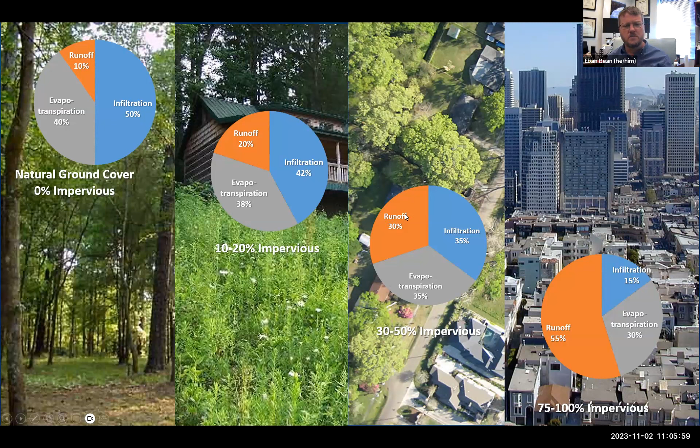So we have to mitigate that. Our conventional approach has been to kind of send that from the impervious surfaces into the street, and then into our storm drain, into our stormwater collection system, and then into our stormwater ponds.

Stormwater ponds were initially created for flood control and flow rate control, to make sure flooding and erosion don't affect our downstream neighbors. But they also have some water quality benefits.

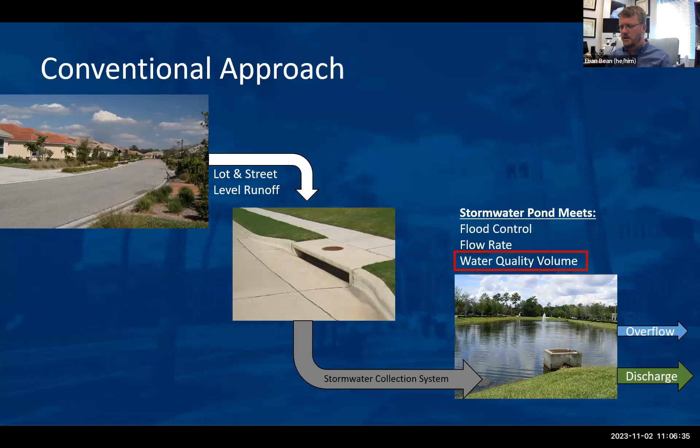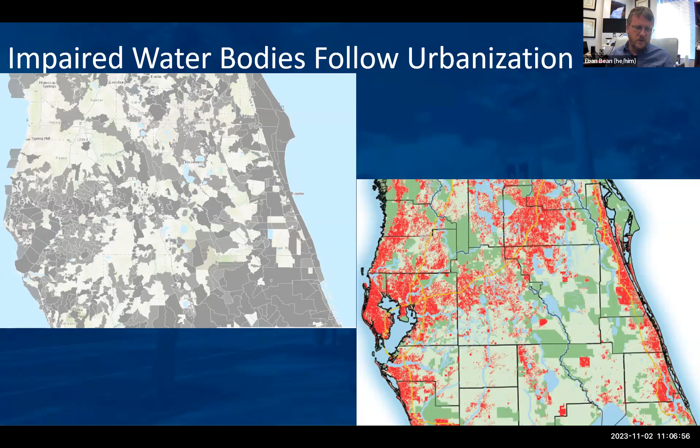However, some nutrients, particularly nitrogen, aren't removed from stormwater as effectively as we once thought. Over time, we've seen that impaired water bodies around the state, areas not meeting water quality criteria, tend to follow the urbanized areas. This is, in many ways, at least partly a result of our legacy of stormwater management, or lack thereof, leading to ineffective or insufficient stormwater treatment, particularly for removing pollutants that come off urbanized and paved areas.

So then we introduced this paradigm of LID and GSI. Most of our focus has been on GSI, but these go hand in hand. Low impact development in the land development process is that first stage where we look at the site and what it has to offer, identifying which areas are good for preserving or keeping as conservation, which might provide greater value in its current state than if we developed it.

That's the point of avoiding an increase in runoff, and then minimizing the runoff. How can we minimize the production of runoff, particularly from small storm events that happen regularly? One of the main ways is to disconnect our impervious surfaces.

So if we have a downspout that goes onto the driveway, the easiest thing any homeowner can do is move that onto the lawn, giving the runoff the opportunity to infiltrate into the ground. This helps mimic and maximize the pre-development hydrologic process, making the landscape function more similarly to how it was before development.

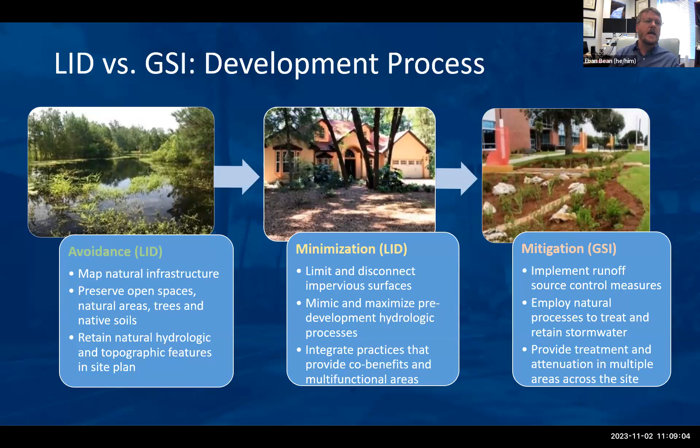These are stormwater practices intended to mimic the functional processes in the landscape, to infiltrate, store, and treat stormwater runoff close to where it's generated. They're really good for addressing those small, frequent storm events where we weren't able to completely eliminate, avoid, or minimize the runoff.

Then we started looking at different types of practices, beginning with some innovative ones—in this case, tree boxes and suspended pavement systems.

With tree boxes, we're looking at how we can essentially leverage the powerhouse of the tree to take up and evapotranspirate stormwater, often generated from an adjacent roadway—either taking it up and evapotranspirating it into the atmosphere, or allowing it to sink into the ground.

These practices are exceptionally valuable for areas in the right-of-way and for retrofits where we don't have a lot of space to work with, but maybe have a long linear space available. Through different products and technologies, we can create a lot of storage volume between the roadway and the pedestrian corridor.

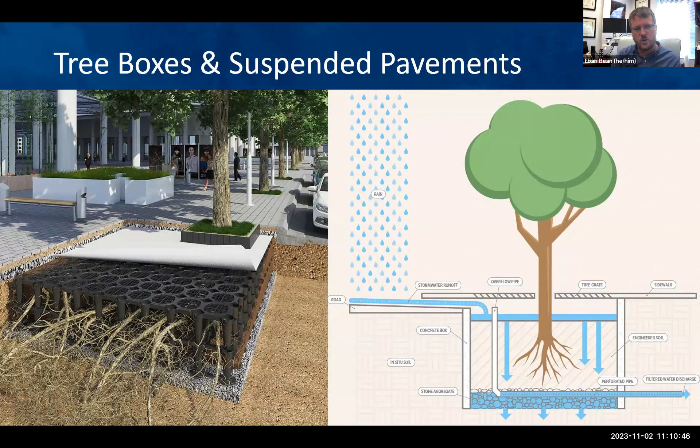Then we took a look at pervious surfaces or permeable pavements, however you like to use the term, and looked at their functionality and characteristics. There are about three main types: porous asphalt, porous concrete, and permeable pavers.

Porous concrete, I love this image and diagram. It's easy to identify pervious concrete because it looks like concrete, but it has the structure and texture of a Rice Krispie treat. Porous asphalt and porous concrete work very similarly.

They have interconnected void spaces created by removing the very fine particles from the mix of asphalt or concrete. The large particles are bound together, and the void spaces that would have been filled by that smaller aggregate allow water to move through it.

Though there's a difference in what they look like on the surface, they're fairly similar below as far as the profile goes: your choker course, and then a reservoir course.

And the soil down below. Now, we can put in under drains, and we touched on that for areas where we either don't want to infiltrate, or we may not have sufficient capacity to completely infiltrate, or if we just want this to function as a flow-through detention filtration system, particularly in areas where we have limitations on infiltration.

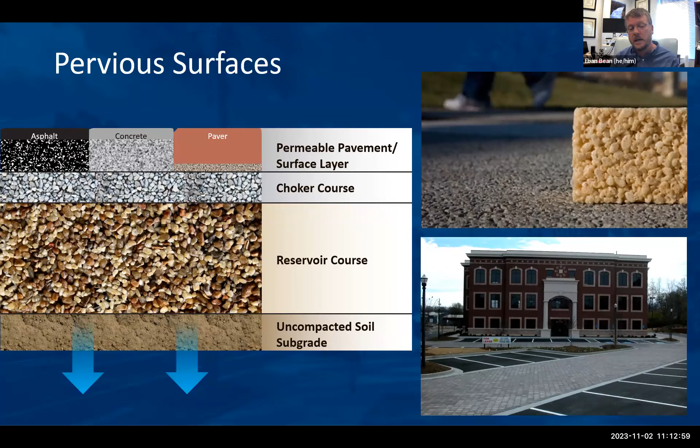We can typically take runoff—we tend not to recommend going above 1-to-1, but absolutely not greater than 5-to-1 impervious to pervious area. It's a really flexible and valuable practice, particularly in areas where land cost is high.

Next, we looked at bioretention and rain gardens, remembering that bioretention typically has some added features beyond rain gardens. We see these as a really flexible option, particularly in the right-of-way, where we can provide treatment for stormwater and also a landscape island sort of aesthetic.

The profile of bioretention is key here, where we typically store about 9 to 12 inches of water on the surface. There's a mulch layer, and usually an engineered media. That's one of the distinctions from rain gardens—that media is designed to remove pollutants and take up nutrients to improve water quality.

They typically have an under drain as well, to help recover that storage volume if needed. Some of them have this upturned elbow outlet fixture, where the pipe extends up from the bottom.

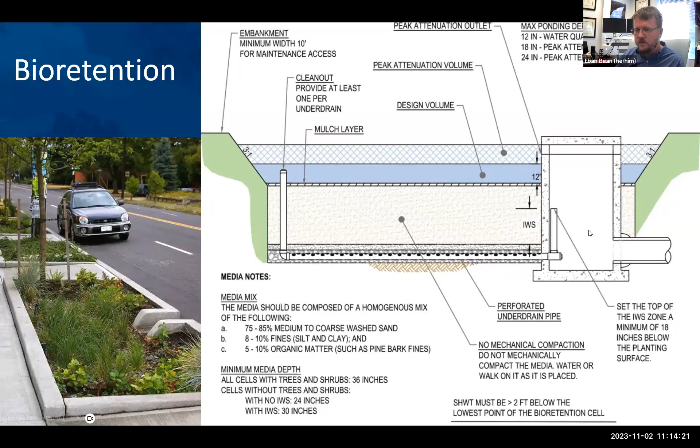This is basically all sealed, so the water level inside has to rise to this elevation before it overflows and leaves. This creates an internal water storage, which can also help with some of the water quality benefits of bioretention.

Rain gardens are typically a simplified version of bioretention, and work very similarly. They're a depressed area in the landscape, but don't typically have a stone aggregate under drain layer. They're more likely to just capture runoff and then infiltrate into the soil.

You might improve the soil by incorporating some soil mix, compost, or topsoil in that area, just to promote better infiltration. It's something that can also be built by a homeowner on a regular basis or on a weekend, so it doesn't require necessarily any advanced training.

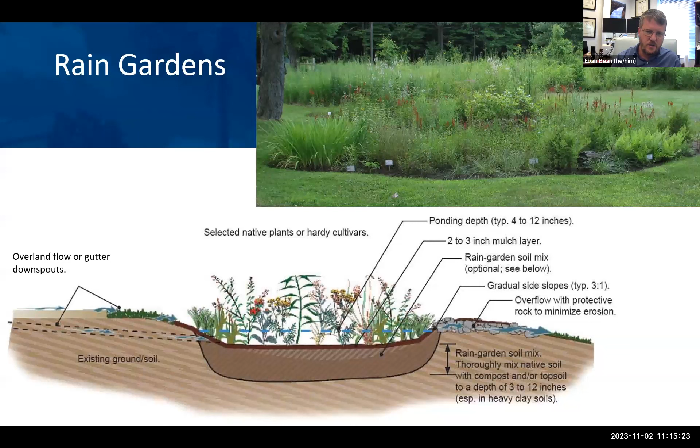Just keeping in mind that rain gardens and bioretention are very similar, I typically explain that bioretention cells are designed by an engineer to meet certain specifications, whereas a homeowner can design and construct a rain garden on their property over the weekend.

Bioswales are another practice that we looked at. These are really helpful for long, narrow corridors adjacent to right-of-way where we want to provide some filtration of stormwater. They help convey stormwater while also filtering it through an engineered media that's between the top and the bottom of the bioswale and the underdrain.

That water has to flow through here, and this slows down the flow of stormwater through it, and then it can be discharged through the underdrain. Typically we can also have some infiltration into the surrounding soil, as long as we have good separation from the seasonal high water table or we don't have restrictive soils.

But in high flow situations, our system functions more like just a swale, and we'll typically have an overflow at the end or an outlet, sort of a riser box that might have a grate on top of it.

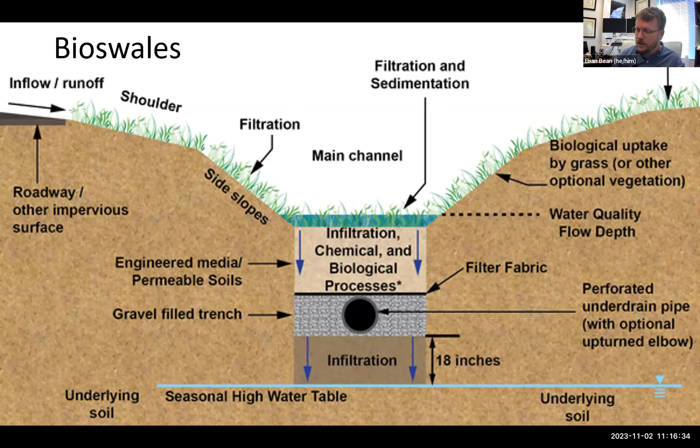Bringing this full circle and integrating it back to our conventional approach to stormwater management, we typically would have put the roof runoff and driveway runoff into the street, then into the storm drain, then into the stormwater collection system. But with GSI, we're trying to integrate these practices into the landscape higher up, closer to the source area, making them part of the landscape and increasing its functionality by capturing particularly those really small, regular rainfall events so we can capture, treat, and filter that stormwater before it goes into the stormwater pond. This way, water quality is treated by our GSI and we're not relying solely on our stormwater ponds to do everything for us.

Stormwater ponds are designed for really large storm events, for flood control and flow rate — this might be 10 or 12-inch storm events within a day. Whereas our bioretention and GSI might be designed for a 1 or 2-inch event that happens maybe a few times a year, but provides a lot of benefit for those frequent storm events that happen regularly throughout the season.

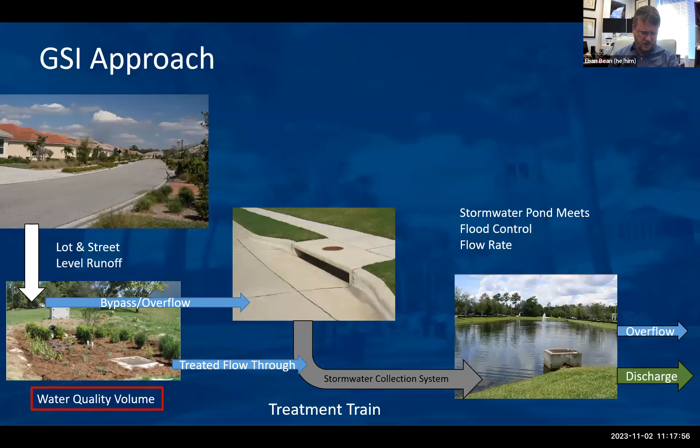We also touched on the importance of maintenance for all of these practices. One of my favorite quotes is that everyone wants to build, but no one wants to maintain. Maintenance is such a part of conventional stormwater infrastructure as well as green stormwater infrastructure. If they're not maintained, the system starts to not perform as designed. We can have blockages created by debris or sediment buildup that reduces flow, which can cause localized flooding and issues to the surrounding landscape. So it's important to stay on top of maintenance and schedule it.

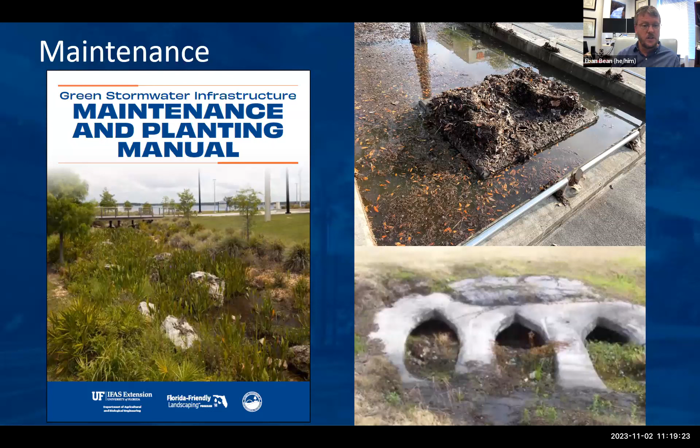We've also touched on the fact that we just released a GSI maintenance and planting manual. Plants are one of the biggest aspects the public looks at with GSI, and how they evaluate whether it's healthy is really looking at: does it look good, does it look healthy? Being able to identify which plants are good for a certain GSI, or which types are not doing well and might need to be replaced, can really go a long way toward making that practice look more healthy and successful. Keeping the flow of water moving into and out of these systems and keeping plant health up helps ensure these practices function at least as well as they were designed to.

We were then joined by Pete Singhofen, the designer and creator of basically the most common and popular stormwater modeling system for GSI and stormwater management in Florida, ICPR, who showed us a really interesting presentation on how we can use these types of models to evaluate different types of GSI.

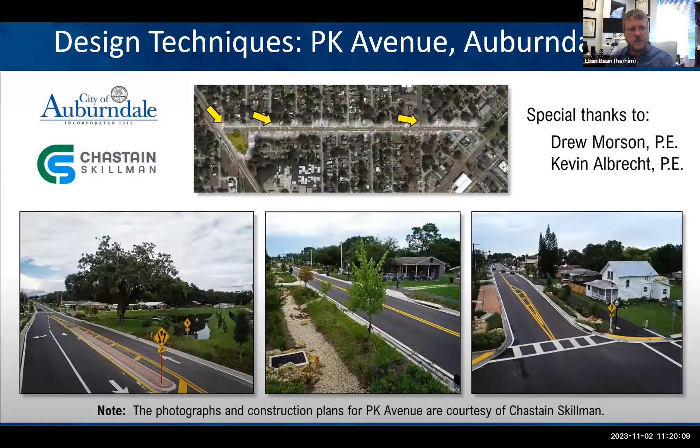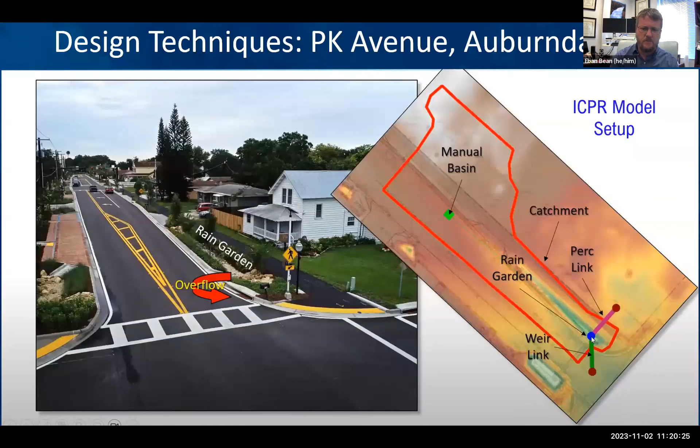He went through a project in Auburndale, Florida, where they had retrofits of stormwater practices along, I believe, PK Avenue, and showed how they were able to simulate it beforehand. They worked with Chastain Skillman, Kevin Albrecht, and Drew Morson on this design. It was really interesting to see how they routed water from the generating impervious surfaces into rain gardens and permeable pavements, and how the different elements function together.

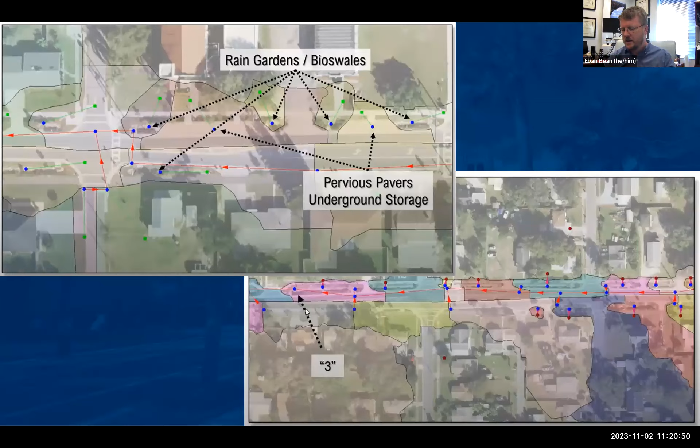We can use these tools to evaluate, size, and spec out what types of GSI need to be built. We were able to look at how these systems integrate a diversity of practices — permeable pavements, underground storage, rain gardens — all linked together, and see how these systems function together.

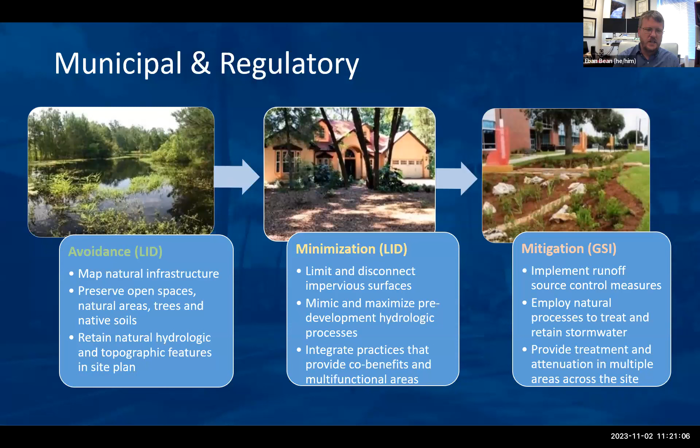Finally, in the last webinar, we looked at municipal and regulatory issues, and back to this whole idea of LID and GSI, I pointed out that GSI is oftentimes dictated by the rules that apply to it. A lot of it comes down from DEP and the water management districts, and really originates from the EPA through their NPDES programs and other acronyms, but also the MS4 program.

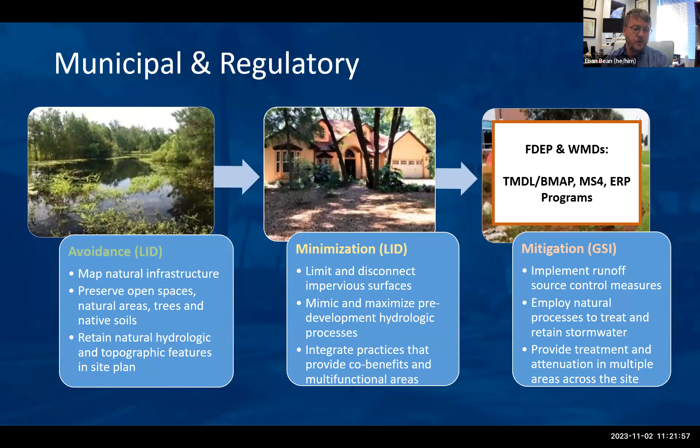So these are municipal separate storm sewer programs, and the TMDL and BMAP programs, which address our water bodies that are not meeting their water quality criteria. The ERP program is one that potentially could be updated if the new rule is passed by the legislature in the next year, and that could really open the door for a lot more GSI to be used to meet the ERP program. So we're seeing that down the road.

But there's a lot that local governments can do to incentivize LID and GSI. We looked at how codes and ordinances come into play, particularly the comprehensive plans and zoning, and requirements such as curb and gutter, and how that can directly or indirectly dictate what the stormwater management approach is.

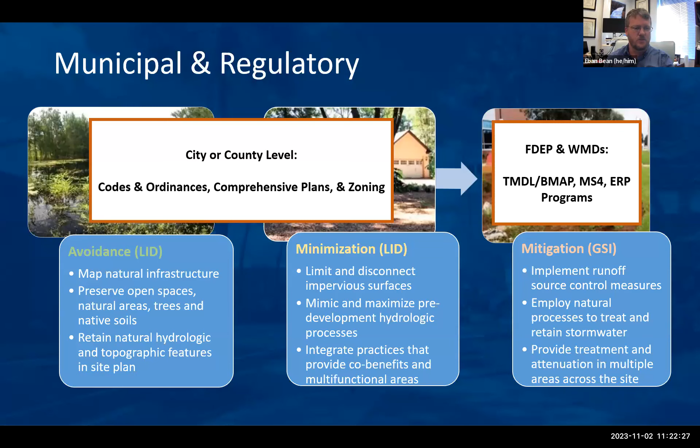We went over one of the tools we've developed for auditing and evaluating local codes, identifying areas that could be improved or where certain weaknesses might be in the code. We're continuing to improve this, and we're actually in the process of a phase 2 that would help to suggest or identify example codes from around the state for local governments to adopt or build off of for their own codes.

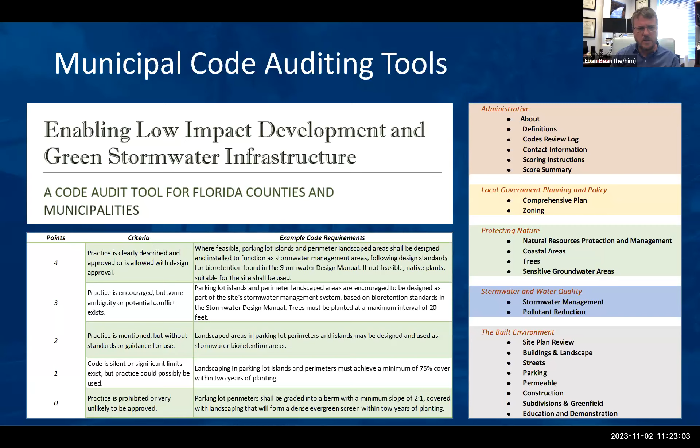And so that's an overview and summary of what this series has been about. We hope that's been valuable to you, and you've gotten a lot of information. If you haven't seen one of these, or I touched on a topic you weren't familiar with or didn't recall well, these videos are on the FFL webpage and the GSI webpage for DEP, so you can always go back and re-watch them to refresh your memory.

So now I'd like to transition into going over a few case studies. I'm going to cover a few, and then my collaborator, Jessica Brusso, is going to cover some as well. We want to provide some examples of where GSI has been implemented and give an in-depth examination of them. So the first project I want to touch on is Sweetwater Preserve.

This is basically a county park area, trails and nature area. It was a stub road that was originally created in anticipation of an apartment complex that was going to go in the natural, forested area. That project fell through before anything could be done, but the stub road was always there, so the county basically uses it.

It was used as an access point for the trails in this area off to the right here. The boundary of the project is shown in the yellow outline, outside of Gainesville. This area directly drains to Sweetwater Branch, which is an impaired stream for nutrients in Gainesville. If you're familiar with Sweetwater Wetland, this is just upstream of where Sweetwater Branch flows into Sweetwater Wetland. So a separate project, but fairly close by.

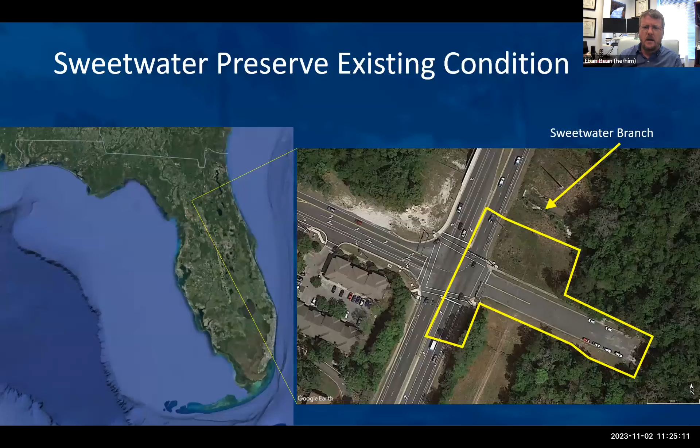So in about 2020, the county developed a retrofit, or GSI retrofit plan for the site, where they wanted to implement a few examples of GSI. They've implemented permeable paver parking spaces, added a loop so it was more convenient to access the forested area for trails, added designated parking spots, and incorporated bioretention.

We worked with the county to develop a design that would help us evaluate a few different design elements of the bioretention cells. There's some aspects of trying to figure out the best criteria or characteristics for bioretention media, that material below the mulch but above the underdrain. What do those characteristics really need to be to be most effective for achieving water quality goals?

One of the main aspects of interest here is that in Alachua County, there's an area where it indirectly requires some pre-treatment before stormwater goes into an infiltration basin. So it can't just go directly into an infiltration basin or retention pond. There has to be some pre-treatment or other kind of treatment beforehand. So we looked at a few different types of media.

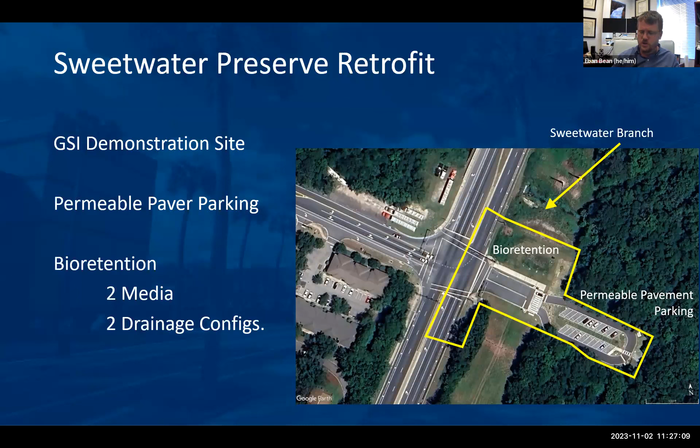And so here's the parking lot, and I want to go over some aspects of this real quick, just some lessons learned with this one.

If you notice here, again, this is an example where they didn't use permeable pavements across the entire site. They just used it in the parking stalls, and the drive path here was left to be conventional asphalt, and the pavers were left here.

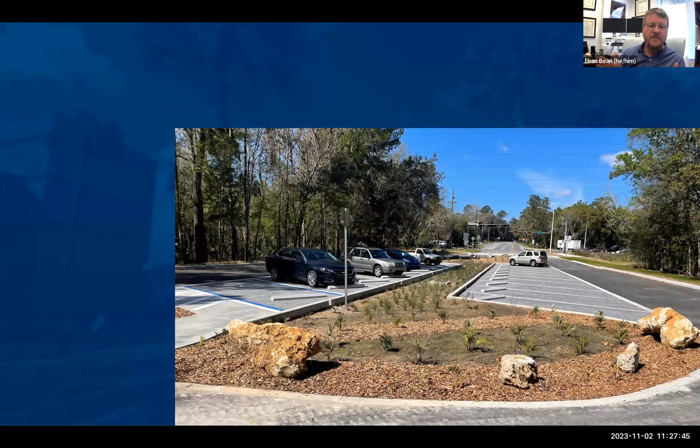In the middle, if there is any runoff that does come from the permeable pavers that is not able to be infiltrated, from the runoff from the asphalt, that then overflows into the bioretention cell here in the middle. You can see these openings in the curb that allow that overflow to go into the bioretention area.

It's almost a coarse sand. We'd like that to be a little bit bigger. So making sure we have the right size material can go a long way to making sure it's right. It's easier to maintain.

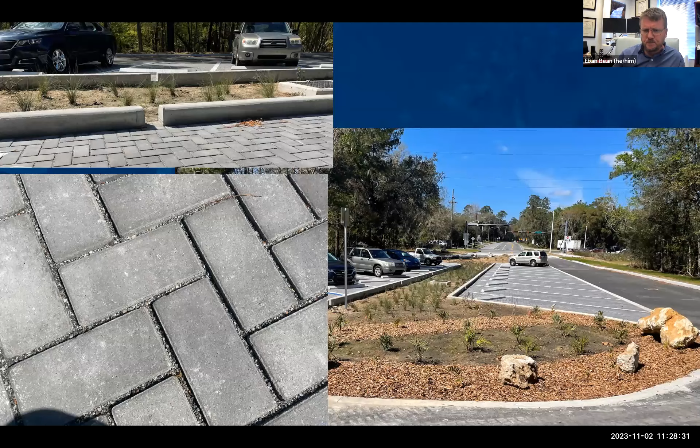Within this area, they chose to plant some bulrush or rushes in the system. This is fairly new after installation, so it hasn't had a lot of time to grow up.

However, the lack of mulch here is probably something that I would discourage. Probably use pine straw, or if we could find a triple shredded hardwood mulch, that would be good to keep some of these volunteer invasive plants or weeds that are coming in from establishing and growing up.

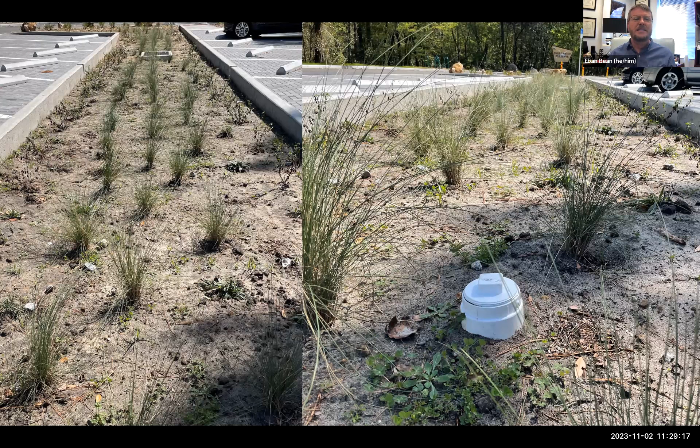You can also, if the plants get large enough and they're planted dense enough, that will also help to prevent that from happening.

There are some other plants as well here in the bioretention along the sides. You can see sort of the white cap here - this is the clean out for the underdrain.

It's important to identify that, as if we're doing maintenance, to make sure that's installed so you can go in and identify if there's a problem with the underdrain here. It's always good to be able to inspect that whenever we're doing an inspection.

One other thing I wanted to point out is we do have an overflow on the left side. If you follow the rushes all the way up to the end, you'll see there's an overflow there for any excess water that's not able to infiltrate into the bioretention. This prevents ponding from backing up into the parking lot and beyond, and allows for safe bypass of that water to go into the storm drain system and discharge for the largest events into Sweetwater Branch.

When we looked at the bioretention here, this was a project where we wanted to look at some different aspects, basically leveraging this demonstration project to answer some questions about the design of bioretention and what could be effective from a treatment standpoint for meeting the performance criteria for Alachua County.

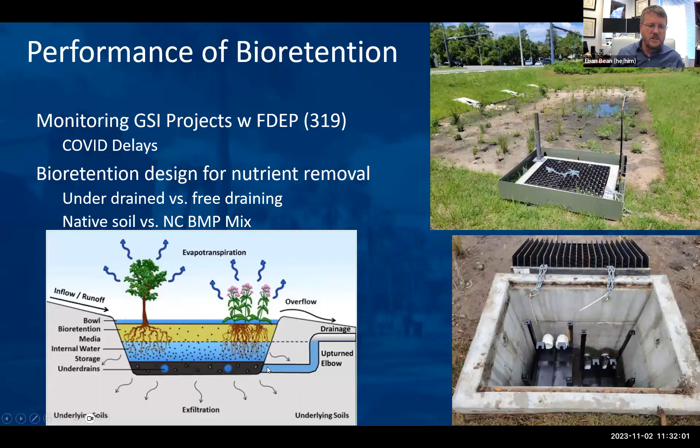Again, we were looking at this comparison between just an underdrain with the upturned elbow and a free draining system. The upturned elbow would basically back up the water into the cell and create this internal water storage zone. The free draining system, to simulate free draining into the subsoil, used underdrains at the bottom that would not create this internal water storage.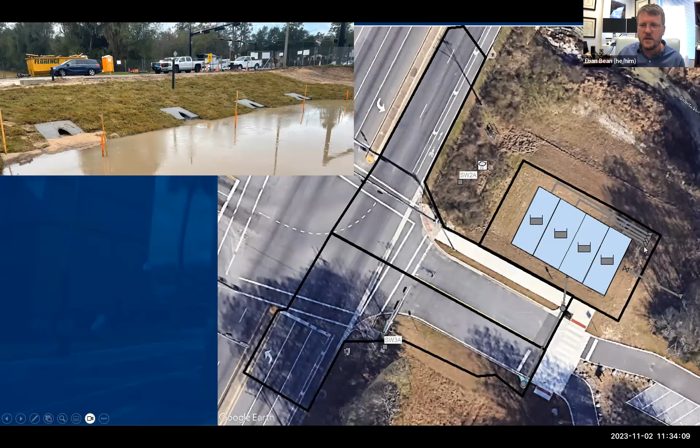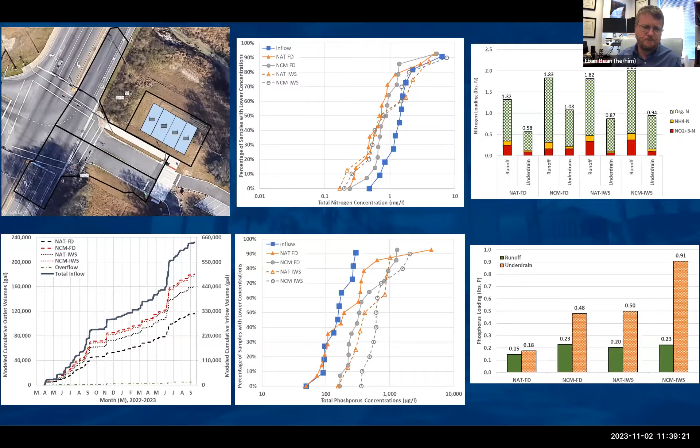So just want to transition to the next case study, another one from our town here in Gainesville. The city of Gainesville and Alachua County have both done a great job with piloting and putting in demonstration projects of GSI and a diversity of them. This site is Innovation Square, if you're not familiar with it. This is within the Tumblin Creek watershed, which has been impaired for a long time.

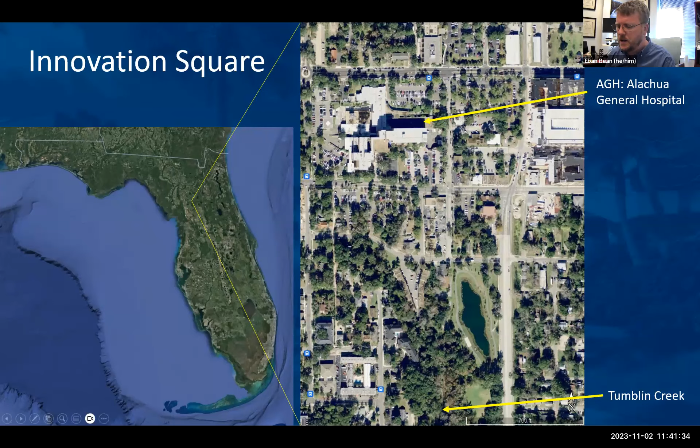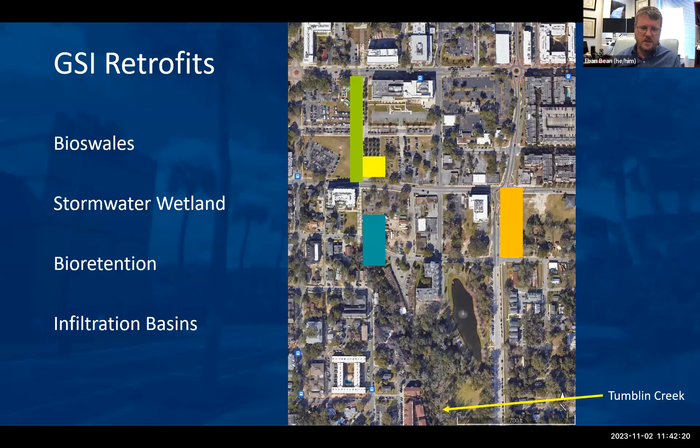This is a current aerial photograph from Google Earth of the site, and I want to highlight some of the projects they've put in place. Notice that this area up here where the hospital was looks a lot different—this is the core of Innovation Square, and the overall area we might refer to as the Innovation District. They put in bioswales, which I'll cover each of these practices along 9th Street. They have a stormwater wetland as well, some bioretention area, and infiltration basins that were retrofits to help address the stormwater runoff here.

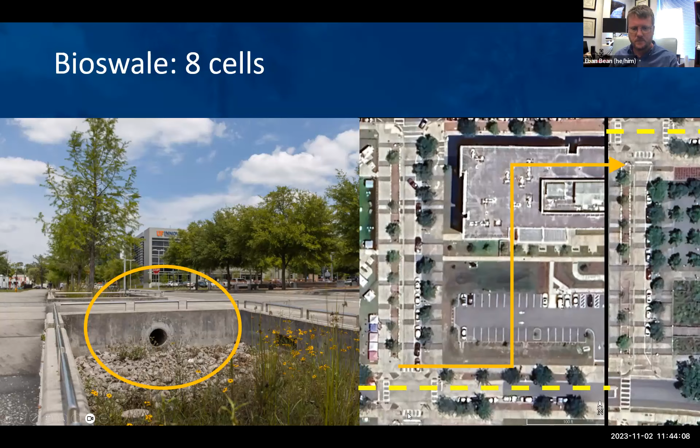Just sort of a streetscape view here. You can see better the storm drain inlets along the street that flow directly into the bioswale, and then on the far side is where the pedestrian corridor is. This provides a barrier or separation between the high traffic pedestrian corridor, but you also have the sidewalk right here adjacent to the street if need be. And you can see the trees are doing fairly well in these cells.

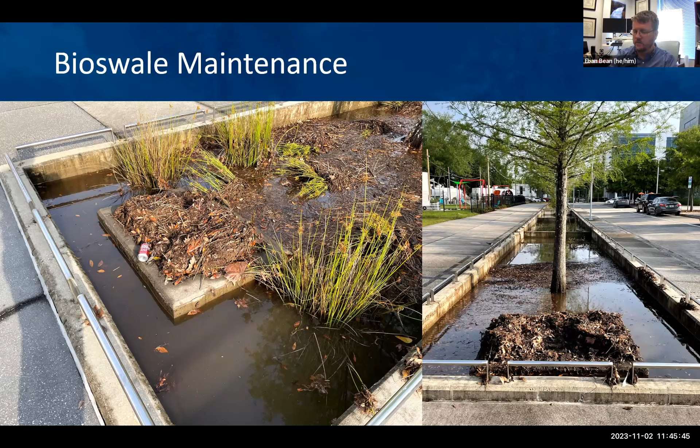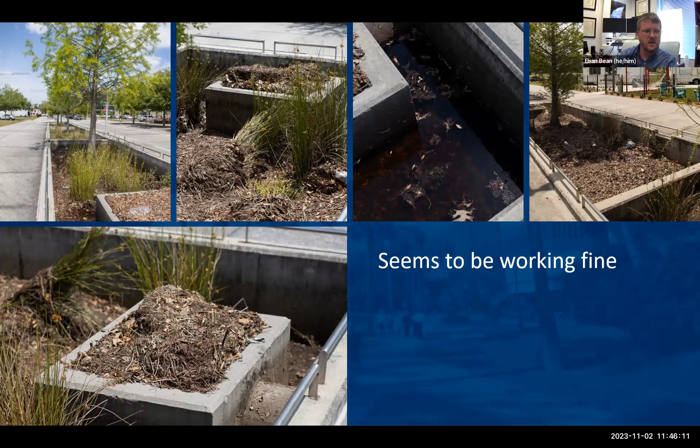So we might see, for example, in this bioswale, it might look like this on a normal day where things seem to be working just fine. There's very limited standing water. Maybe at the very end, at a very low spot, we have a spot of standing water, but it seems to be working fine. Maybe we have a little bit of pine straw accumulated on the surface from a previous storm event, but the cell seems fine. A little bit of water, that's okay, we don't need to worry about a little bit of water, right?

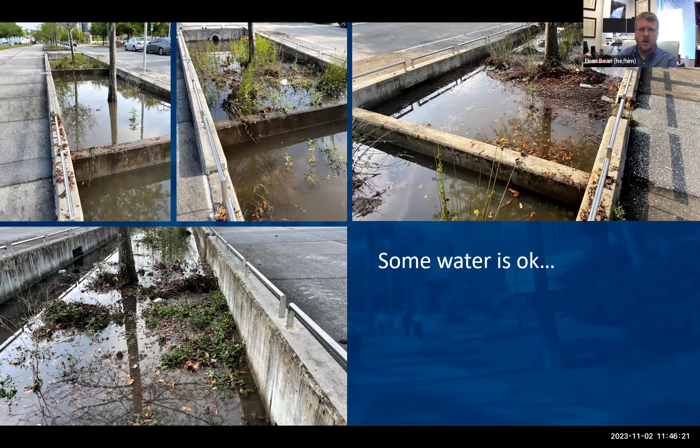Well, this is when we have these severe events where we haven't done the maintenance to address the clogging and remove the material that is causing the system to not perform and not flow as freely. Remember that the number one priority in any stormwater system is to make sure that conveyance can occur effectively, and that prevents or at least addresses the concern about nuisance flooding.

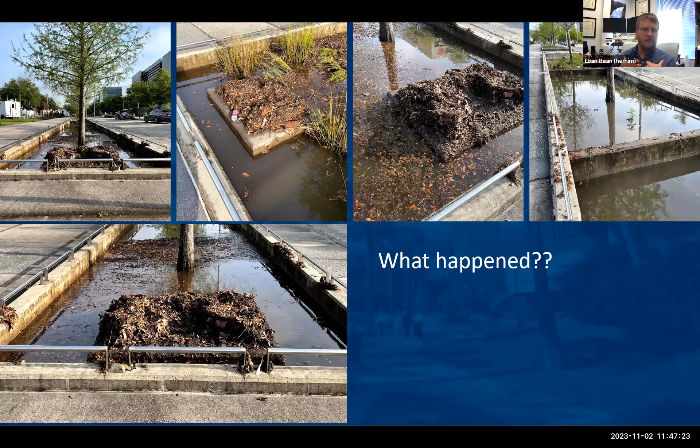So if we take a look at the stormwater wetland, I will note one thing actually moving back here. If you can look in some of these cells, you'll see that some of them don't really have much vegetation above the water surface. That's probably something that could be addressed, where either the plants put in are not thriving for one reason or another, and maybe we need to switch plants. That can probably help with holding back some of this debris or organic material and preventing it from washing and getting scoured out down to the outlet.

The wetland here is adjacent to, basically just across 9th Street from, the very end of the bioswales, which are right here. And here is our wetland. We have basically 3 or 4 cells, depending on how you want to characterize it.

These are essentially half walls, or in some cases a full wall that extends as a weir or half wall across, retaining water back here like a forebay, allowing sediment to accumulate and drop out. You can see it more clearly here where that half wall is shown. Each cell works the same way, and the water gets cleaner as it moves through.

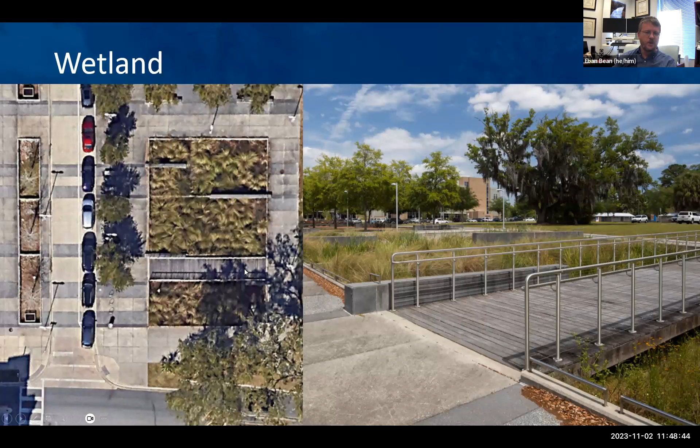This is a somewhat innovative design where they have a walkway going across it. Since this is a pedestrian area, it's good to bring people close to it and integrate it within the pedestrian walk area. One innovative aspect is that the overflow is actually down below this bridge, so you don't see it, but it's easy to maintain by accessing through a trap door if you know where to pull up to reach the overflow.

The infiltration basin here is another area where they've retrofitted and created additional storage capacity and volume control. Notice this is a walkway and path with some observation points. They've done a nice job putting in very robust materials here, so it's not like wood that will just decay—it's fairly resilient to the environment and a really nice pedestrian area to walk through. You can see the layout of the system here, with the overflow receiving runoff from the adjacent impervious areas around the site.

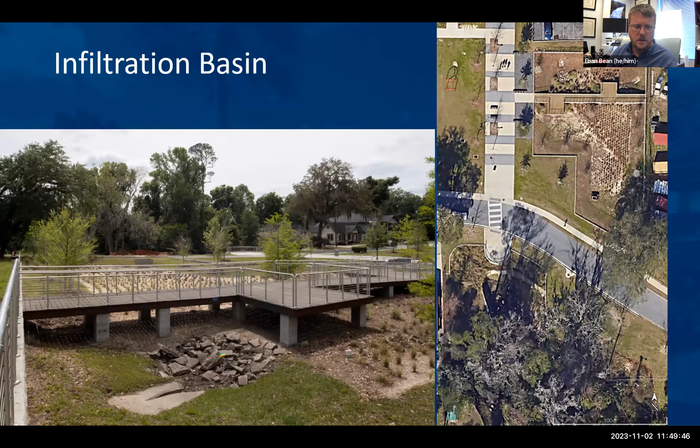Now, one aspect I would encourage future designers to address is putting in larger plants. This one has some rushes and smaller plants, and until they get really robust and fully grown, it's very difficult for them to shade out or choke out any weeds that might come in. This also creates an issue if these plants are cut too short and not able to maintain their full growth.

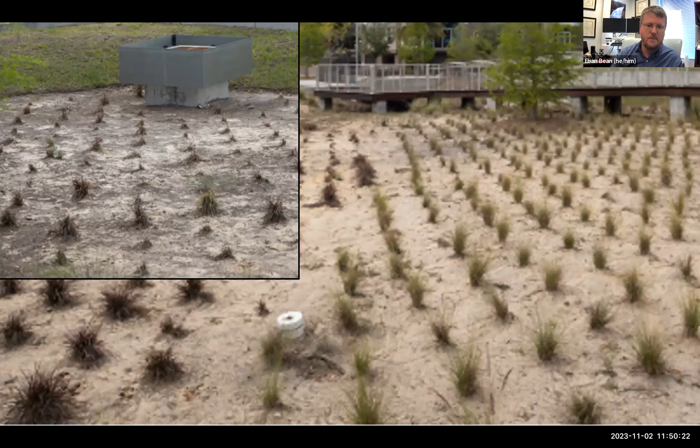When we look at bioretention, some of these cells have done a nice job integrating into the adjacent space near the roadway, particularly between the roadway and a major corridor path. The bioretention here receives runoff directly from the roadway, and there's another nice pedestrian bridge that brings people and the public into closer contact with these practices.

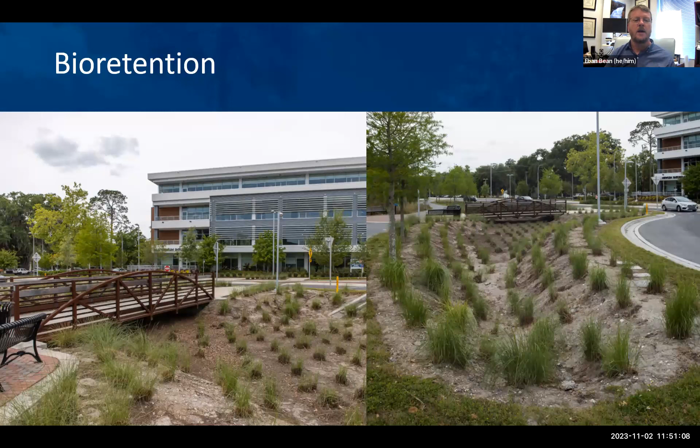I'd say this system is lacking in mulch and could be remulched with pine straw or a triple shredded hardwood mulch. Particularly the type of sand you'll see in a moment is very loose and easy to erode if the soil is not held in place, or if there are concentrated flows, it can easily wash out.

This is an up-close photo, and you can see that even the roots are exposed from the plant—we don't want that to happen. That's going to cause the plant to dry out and make it more susceptible to other factors that won't help it stay healthy. Putting some mulch down will help stabilize this soil and reduce the risk of this occurring.

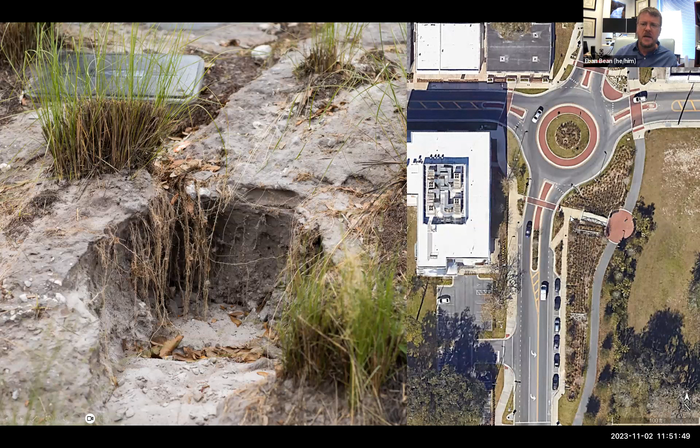Again, this was a space in between a bike or walking path, and they were able to utilize these really narrow spaces to incorporate stormwater management. It didn't need to be a large volume to capture, but it's able to capture and infiltrate that volume of water, so this one does a pretty good job.

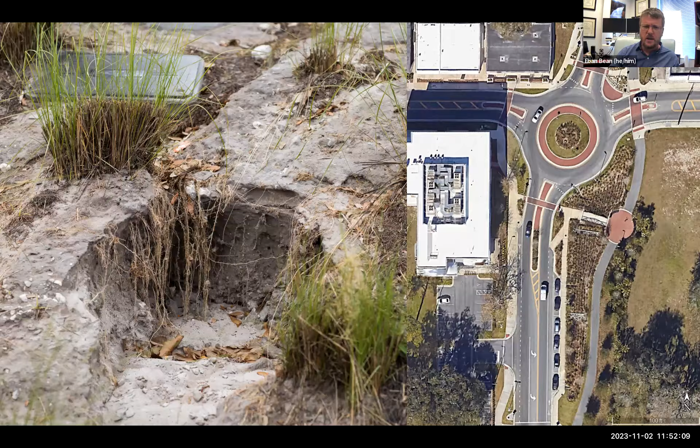But the main thing with this site is making sure we know how to do the maintenance. Here we have very little mulch or material on the surface protecting the sand that can wash out and erode. We see the landscaper has taken out all the vegetation, and it's probably good that these plants are cut back annually, but we need to figure out a way to protect this soil so we don't get these erosion issues—perhaps just in select areas where there's concentrated flow or erosion starting to develop.

It's good to address that at an early stage.

Some of this material being removed may also be suitable for remulching as it breaks down, helping hold that soil in place. I wanted to reiterate the importance of maintenance in these practices, whether for flow control or making sure we have sufficient plant coverage within the basin to prevent erosion and sediment migration. Those are really key aspects. We also have a GSI maintenance training program and resources available through the DEP GSI website.

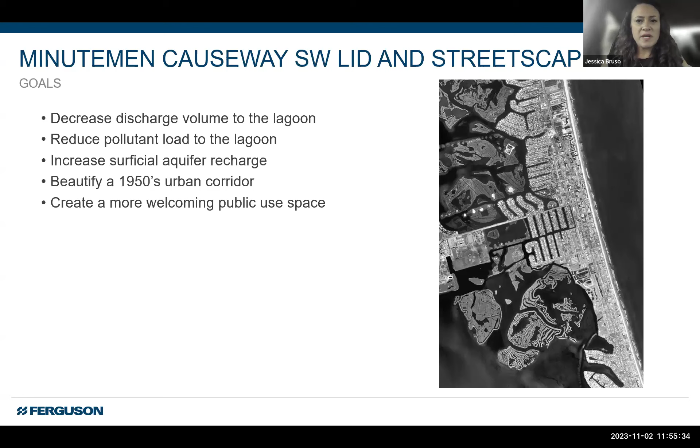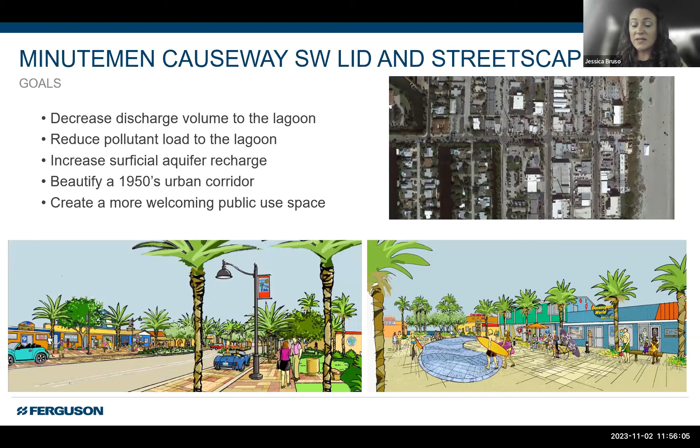This area runs east to west along Minuteman Causeway, the main area in town, extending out toward the schools and neighborhoods. Public Works is out there too, and there's a lot of foot traffic since the main part of the beach is in that area. You can see artistic renderings of what the project was meant to look like, and it actually turned out really close to that.

As for the BMPs implemented, this is a 5-block area, and within it alone there are 30 rain gardens and 28 permeable parking spaces—anywhere there's on-street parking, it's permeable. There's underground storage beneath the easternmost 3 blocks, since there's enough room above the water table there for good infiltration. Heading west, we go from about 10 to 12 feet above the seasonal high groundwater table near the ocean side with nice sandy soils, decreasing to about 2 feet at the westernmost blocks. So there's not much room, which is why site selection for that underground storage was really important.

The sizes of the chambers change as well—they start at about 48 inches, really big chambers, then decrease to a few feet, and maybe even just 1 foot on the third block west. As for tree boxes, there are some throughout; you can see in the center picture with the parking spaces some tree boxes before the trees were planted. These are essentially 43 cutouts, little buckets for water to go into and for tree roots to absorb that water.

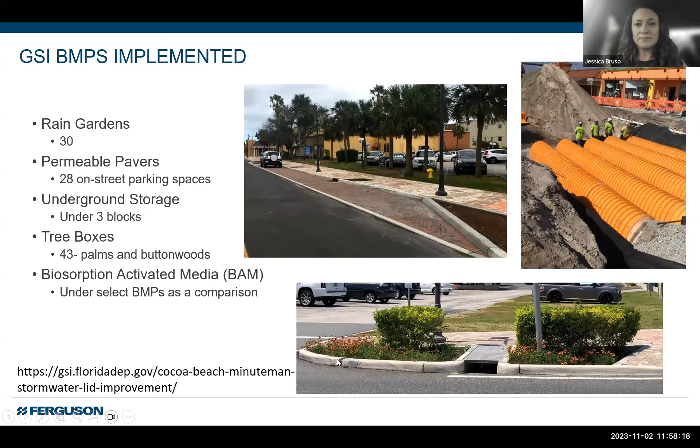I do want to back up one second because there's a really important point I didn't bring up. In this 5-block area, with all of these BMPs put together, remember one of the main goals was to reduce all the water going out to the lagoon, all the runoff going out to the Banana River Lagoon, and therefore reduce those pollutants as well. It's about a 28-acre basin coming down here.

With this project, with these 5 blocks and all those BMPs in place, there was a 98.5% hydraulic efficiency. So that's really, really important. I think during the study year, it only tripped the weir one time.

I'm just going to run through some before and afters. Remember, again, this is a streetscape project, so not only did we do stormwater assets, but we also did pavers walking down the streets and benches throughout, and a lot of different other things.

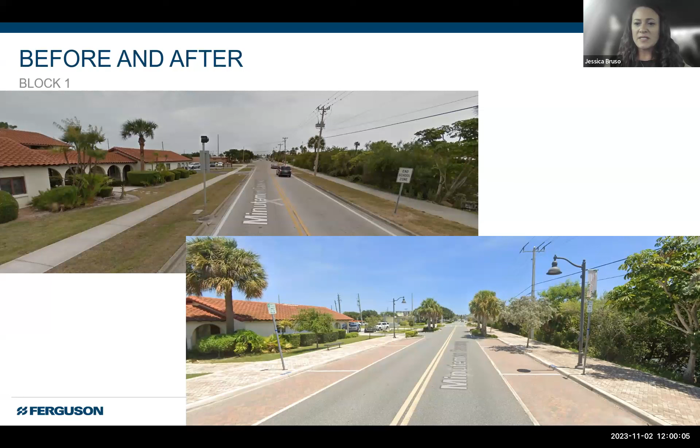So you can see block 1, and you can see the before and the after. It is definitely much more inviting, and of course, we increased the parking as well.

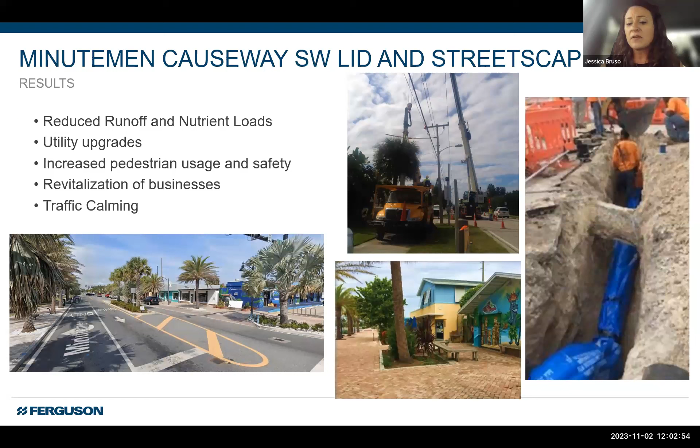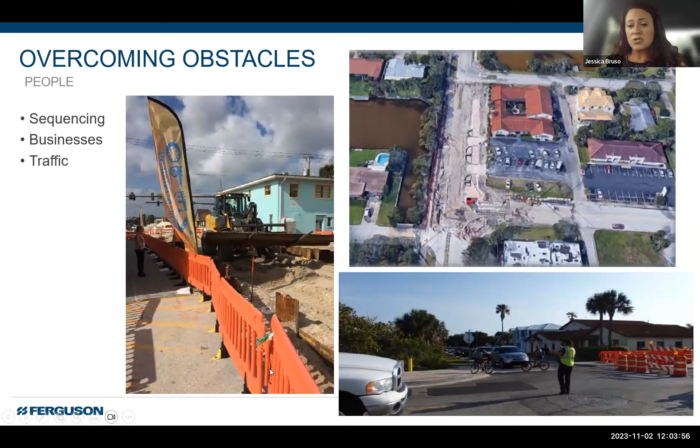Overcoming obstacles like layers and layers of compacted soil and road base that had just been piled on over the years. Any underground utilities also had to be worked around - that was another big thing.

Two hurricanes during construction. Trying to make sure things are protected is very hard. When you have a hurricane come in and you're doing a year-long construction project, we can't stop for 6 months for hurricane season. So we'd come out afterward and clean up, but trying to protect things as best we can during construction.

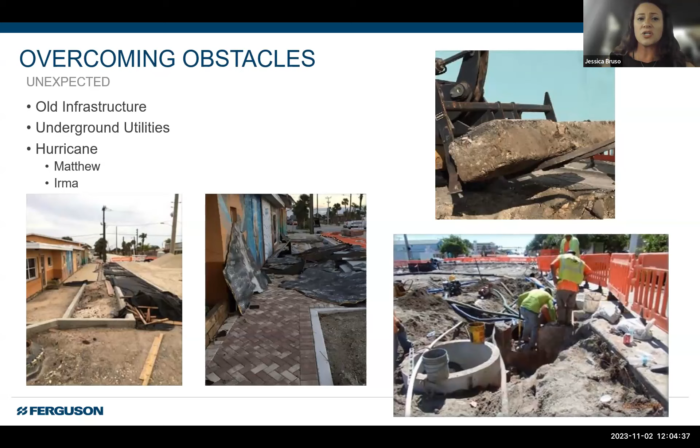As far as lessons learned, our rain gardens had curb cuts, so we made sure that when using those curb cuts, there's some kind of stone at the end so it doesn't wash everything away. The mulch - as you can see, the first mulch put in was easily lifted out by rain events and washed onto the sidewalk. So after that, we switched to pine straw instead.

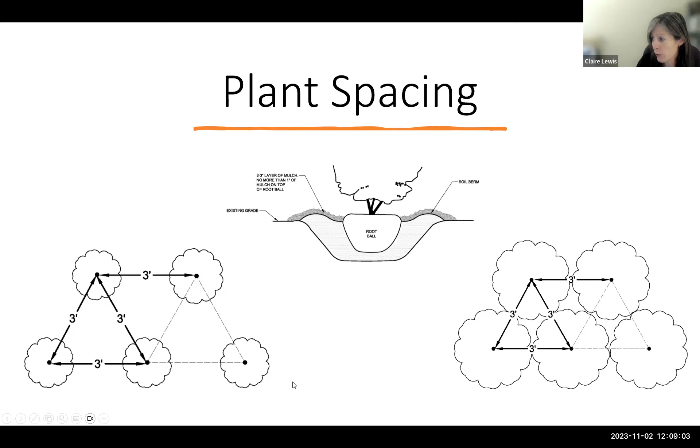Next, after the plants are in the ground, as Dr. Bean has been saying all along, we really need to mulch. It inhibits that weed growth, keeps the roots cool in the summer and warm in the winter, and reduces the evaporation.

As Jessica just showed you, the pine bark often floats away, so we recommend the triple shredded hardwood mulch, and pine straw would be next in line after that. In areas that have a lot of flow or are prone to erosion, we would use rock. And then as the plants grow in and mature, less mulch will need to be added, but keep a layer of mulch until those plants are full grown.

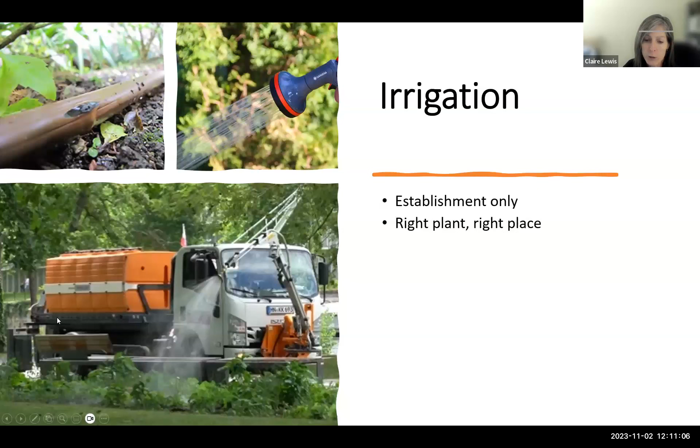For irrigation, we really only want to irrigate to establishment only. So right plant, right place really helps with that, making sure the plants will thrive with very little irrigation. This is maybe a typical way that you would see that implemented, through these irrigation trucks.

Site preparation: we want to minimize lot clearing and add tree barricades, getting the biggest barricade that you can all the way out to that drip line. You want to stabilize the slopes; the slope shouldn't be 4:1 or greater.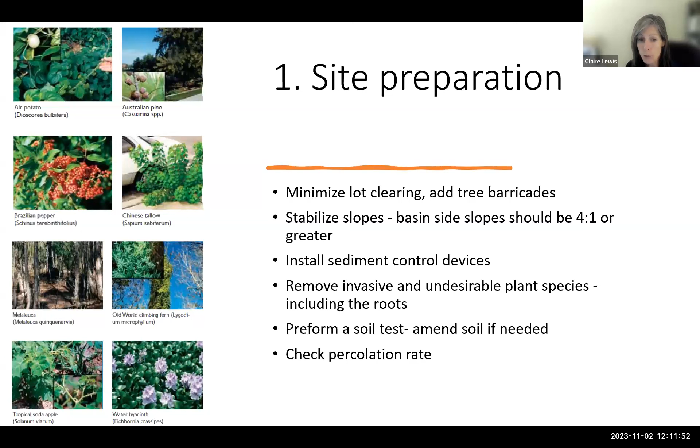You want to remove invasives and undesirable species, and here's a select few of those. When you remove those, you want to take out the roots too, and that will really help reduce the amount of maintenance later on down the line. Doing a soil test is a great thing to do, and amend that soil if needed. Then for these systems, it's really important to check that percolation rate in the beginning.

Next is plant installation. As a general rule, you want to install perennials and grasses during the peak season, which is mid to late summer. This will allow enough time for their root systems to become established before they go dormant in the late fall.

Trees and shrubs should be planted in the spring when there's adequate rainfall to help develop strong roots and leafy growth. You want to water these new plantings about every 2 to 4 days for establishment, and this can take anywhere from 6 to 12 months, varying by weather conditions and location.

Keep in mind that too much water can cause ground covers to develop root problems. So it's a delicate balance between getting them established and not overwatering them.

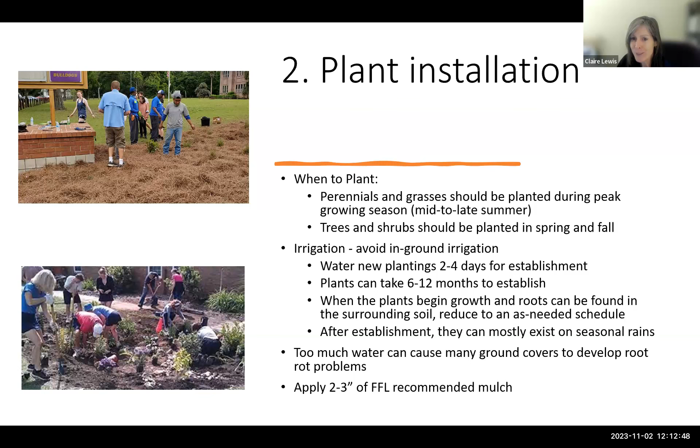We want to keep in mind that routine maintenance is needed. These aren't maintenance-free kind of systems. You do have to go in there and take care of them.

A great tip is to design these systems with clusters of like plants together, making it easier for maintenance personnel to identify which plants are meant to be there versus which are growing or volunteering on their own. We often see some plants outcompete others, which is a natural occurrence, and that may be okay in systems where you want a more natural look. In more urban systems, you may want to ensure plant diversity or that the design intent and aesthetic is maintained, so you might prune back the ones that are really excelling to keep your design intent complete.

Dr. Bean showed an image of this earlier - this is the GSI Maintenance and Planting Manual. We developed this certification program because there's a need for it, as many cities and counties are installing large green stormwater infrastructure projects.

Unfortunately, we've seen some of these systems fail as a result of improper maintenance. So included in this program is a GSI maintenance manual, a plant selection tool, and a maintenance checklist for each of the GSI systems.

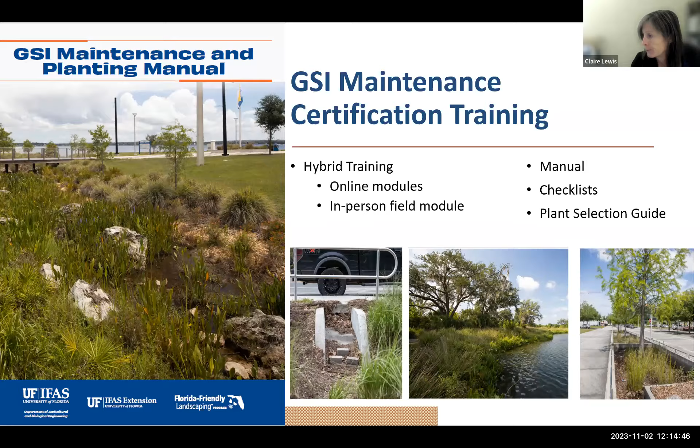This information can all be found on the Green Stormwater Infrastructure webpage. I put that link in the chat earlier, but you'll see there's online and PDF checklists, a link to the DEP Green Stormwater Infrastructure website, a video series, and this webinar series as well.

These are the plant resource information I was talking about. We have the FFL plant guide that's also available - this is a free app that you can use to look for plants. We also have several other apps available.

The Florida Association of Native Nurseries is a great way to locate some of these native plants that we often recommend for green stormwater infrastructure. You would put in the type of plant you're looking for, and it would show you the different nurseries that have it in stock, and also how to reach them and find out when you can go pick up those plants.

With that, that is my recap. So I will go ahead and stop sharing my screen and open the webinar up for questions.

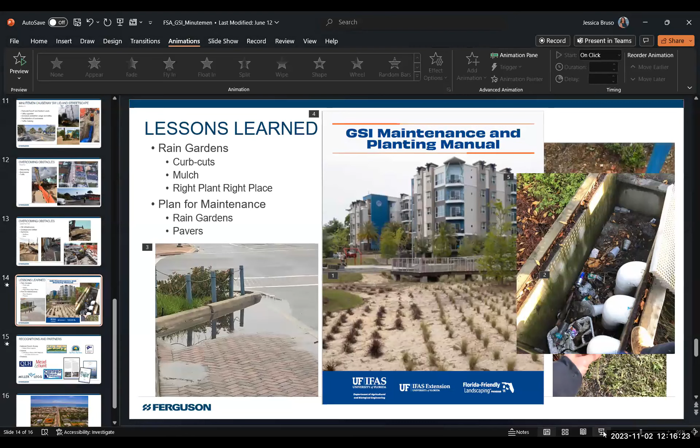All right, so we are here, which I think Claire covered well, and Eban already covered really well about right plant in the right place. There was a lot of that going on in Cocoa Beach, and I know it's still needing replanting and stuff.

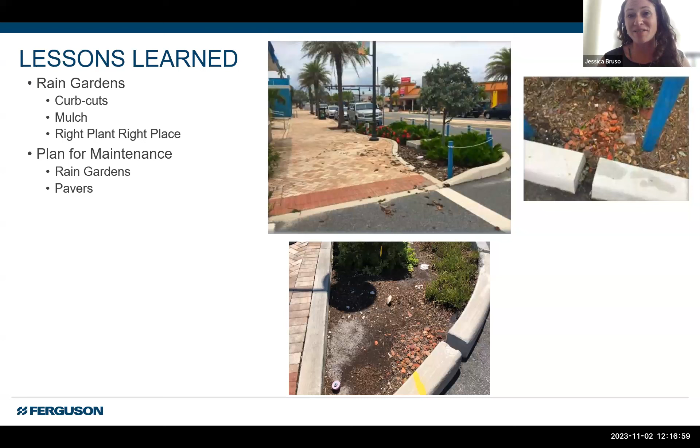So make sure as well when you do one of these projects that you budget accurately, getting quotes of what it's going to be like to actually maintain these if you cannot do it in-house, because it takes a lot of manpower and man hours to take care of these gardens, especially if you're doing replanting, remulching, etc. I would definitely get some estimates from contractors to come in and do that for you, so you know what to put in your budget. I will also say again, going from nothing...

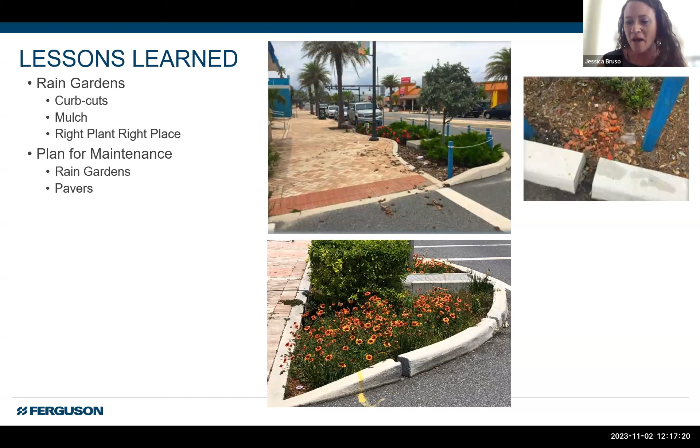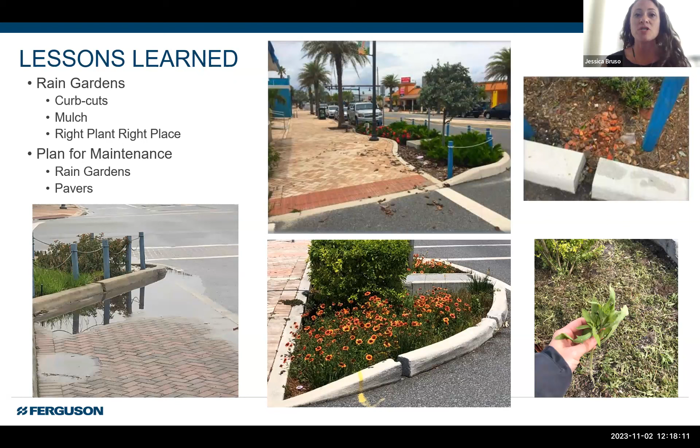As far as pavers, again, knowing the life cycle, knowing when things need to be cleaned out and redone. For these types of pervious pavers, there is an aggregate in between those. That sand, the aggregate, is actually meant to collect different things that go in there. But if there's curb cuts that are really close, what we learned is that organics can sometimes get out of those curb cuts, and then it kind of expedites the clogging of these pavers. So thinking about placement of those curb cuts, and also that plan for maintenance with those pavers, making sure you have that built into the budget, and understand what that entails.

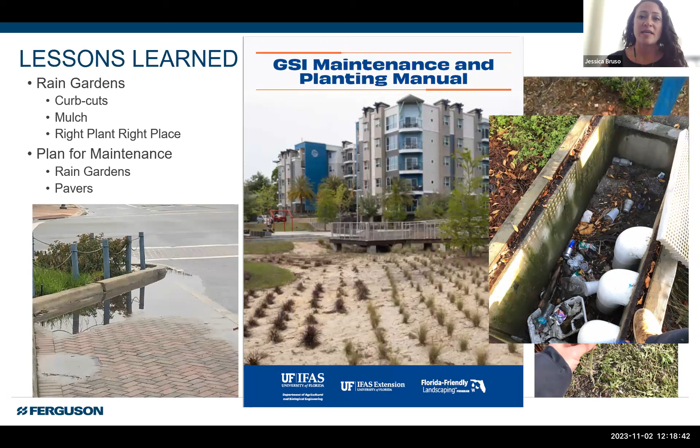I won't go into this because Claire just did, but I do also want to plug the importance of pre-treatment. As you can see here, this is one of the pre-treatment devices that leads into the rain gardens, and you can see all the different things that it's catching. The crew goes out, uses a vac truck, and cleans that out. I just wanted to show you that, to actually see what's being captured. Pre-treatment is really important to centralize that maintenance and keep everything longer lasting inside that garden.

And just to give some recognition to the different partners, different awards, so that we can give recognition to them. And I'm going to hand it back over to Nathan because I know we're getting closer to our time. So thank you, guys.

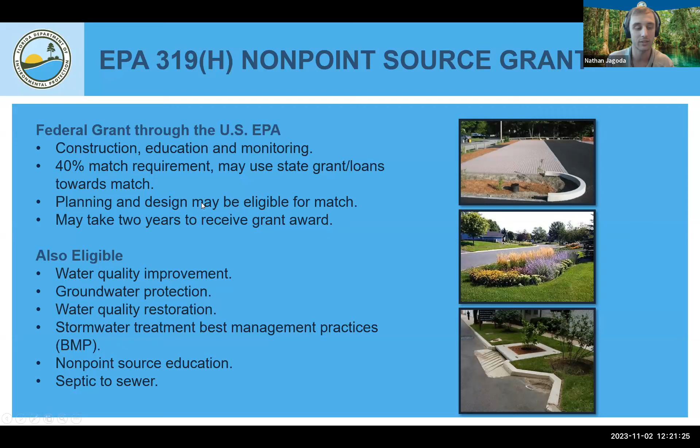Now I'll cover our state grant, the State Water Quality Assistance Grant, which we call our SWAG grant. As I mentioned before, 319 doesn't necessarily need to be shovel ready at the time of applying.

For the SWAG grant, we're typically looking for shovel-ready projects. There is no required match for the SWAG grant. However, including match in your proposal can certainly help when it comes time for project selection.

The same goes with regards to monitoring. Monitoring is not a requirement with SWAG like it is for 319. However, we're very eager to obtain data on our BMPs and understand how they're performing in the world. So having monitoring on your proposal can definitely help with project selection. Again, keep in mind it is a much faster application to award date than the 319H grant.

As I mentioned, with the 319H grant, we're very eager to fund GSI. Same goes with our SWAG grant—very eager to fund green stormwater infrastructure projects. However, we can also fund traditional gray infrastructure projects, including water quality improvement projects, groundwater protection projects, water quality restoration projects, stormwater BMPs, as well as reuse projects.

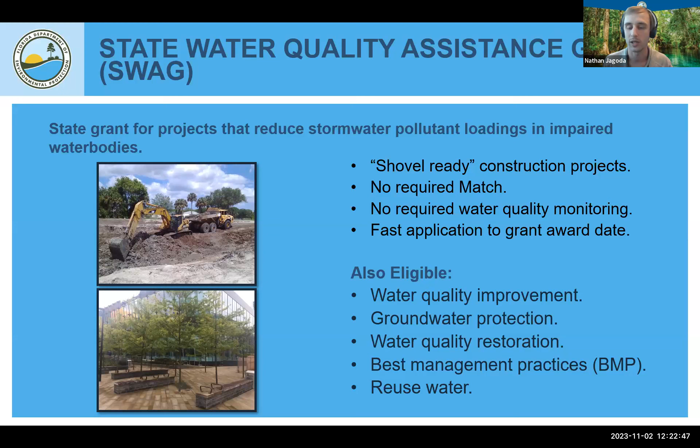Now I'll cover quickly how to submit a proposal. In order to apply for this funding, a grantee must be a local government, a special district, or a public university. We use one proposal form for both of these grants, so you can apply for both at once. You can attempt to leverage one against the other, like using some SWAG funding to leverage against the 319H grant. But it is one proposal document for both grants.

You can use the Protecting Florida Together portal to view grants that are available, not just from the non-point source program, but agency-wide. So across the whole Department of Environmental Protection, all of the grants will be listed on Protecting Florida Together. I have a link to that at the end of my presentation here.

If you would like to get more info on these non-point grants, you can contact Connie Becker, and Connie can provide you with a copy of the proposal document. Connie is the non-point grants coordinator.

Typically, non-point will review proposals once during the fall and once during the spring of each year. There's not an exact date that occurs—it kind of depends on when we receive our awards and different timelines. So you can keep an eye out in the fall and spring of each year. The best way to stay up to date is to subscribe to the division's email list, which I can drop in the chat after this.

Just keep in mind that if funding is available, occasionally it will be awarded out of cycle. Sometimes projects don't utilize all their funding or they don't end up working out, and then there is some funding left over. So you are able to submit a proposal at any time, and if there is funding available out of cycle, we'll do our best to award it, and if not, it will be considered in the next proposal review.